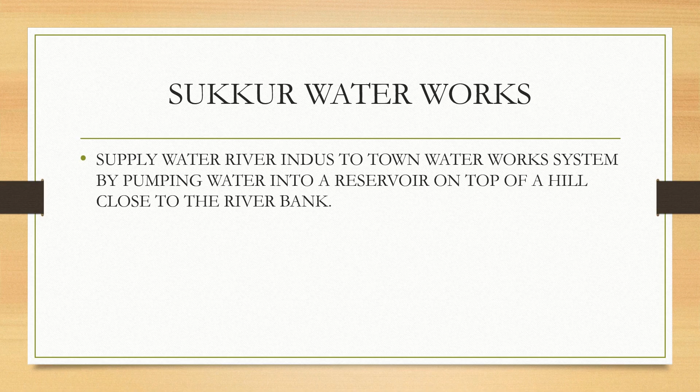There were almost 5 rivers in this location, and the design here was to pump the water into a reservoir which is on a higher side, as close to the river bank. If you see that scheme, you can understand what Mr. Visvesvaraya had done. Seeing his works, I got the impression that Mr. Visvesvaraya was a genius, especially in wells.

In the forthcoming slides also I will discuss, especially the construction of the wells. Here you can see one river, and we have one pumping well near the river bed, collecting water from the flowing river by percolation. But when sufficient water was not collecting, he constructed a tunnel from the river to the well, so that water can be collected in higher proportions. Then this water will be pumped to the reservoir.

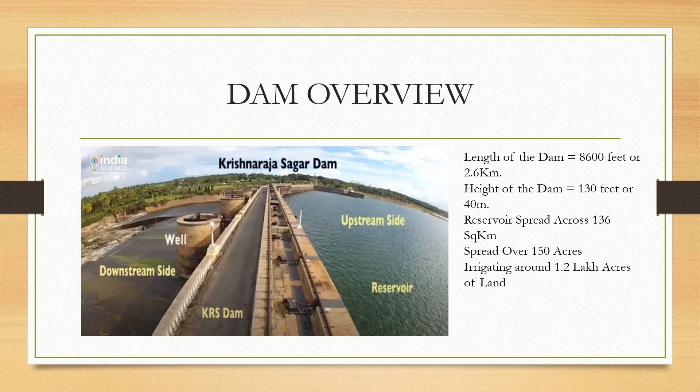Seeing this, you can understand how Mr. Visvesvaraya has affected the lives of the people. He uplifted the lives of the people around him, especially people of India. We should be very thankful for such an engineer. So we will discuss the water management system in the dams using this well in the coming slides.

See, this is the float system chain pulley mechanism. This chain pulley mechanism is connected with the gates. So due to the motion of this float, the closing and opening of the gates is regulated. You can see in the coming slides.

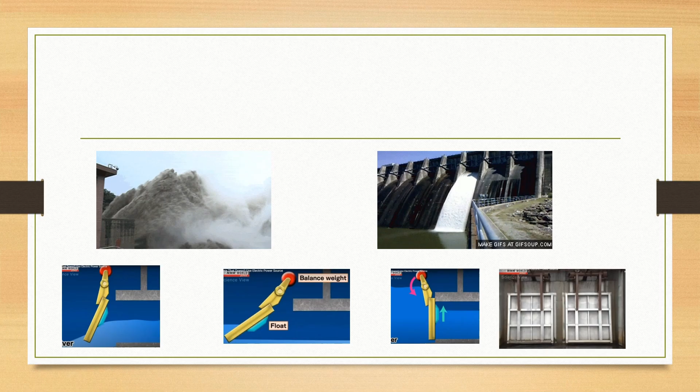So this canal irrigates almost 1.25 lakh acres of land. You can imagine the strength of a civil engineer, how we can bring a revolution in society, creating jobs, creating sustenance for the people. You can see here some images where the water comes from the dam, and you can feel the energy with which this water comes.

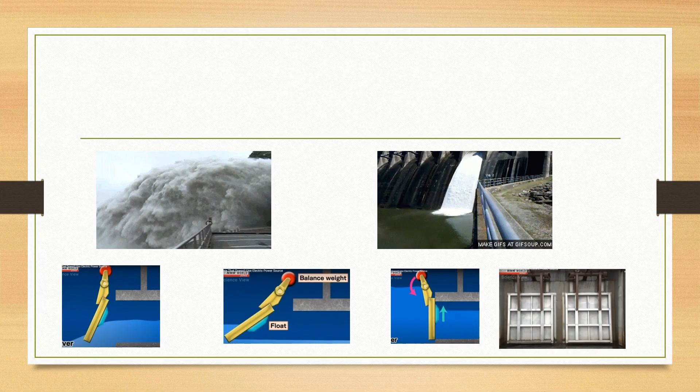And really, when I remember, in 2000 or 2001, when we went to the Nagarjuna Sagar dam, I really felt the greatness of a civil engineer, what he can do. These structures will give you energy and inspiration about what we can do as engineers.

And these gates were copied in the same year in the Panama Canal also. The same gates which Mr. MV sir proposed, and these are the patent of the sluice gate for Khadakwasla Reservoir in the name of our great engineer Visvesvaraya.

And also in Vizag, there was an erosion problem, where Mr. Visvesvaraya suggested sinking two ships to act as breakwaters to arrest the drift problem in the inner harbor. Seeing all these techniques, you understand that whatever he read, he applied in giving solutions to the problems faced by the engineering society.

So in today's world also, all these metros, infrastructure, dams, and industrial growth are problems faced by the people, and we are giving the solutions. There you have to consider safety, economy, and environment. There are so many things to consider in giving solutions to the problems faced by society.